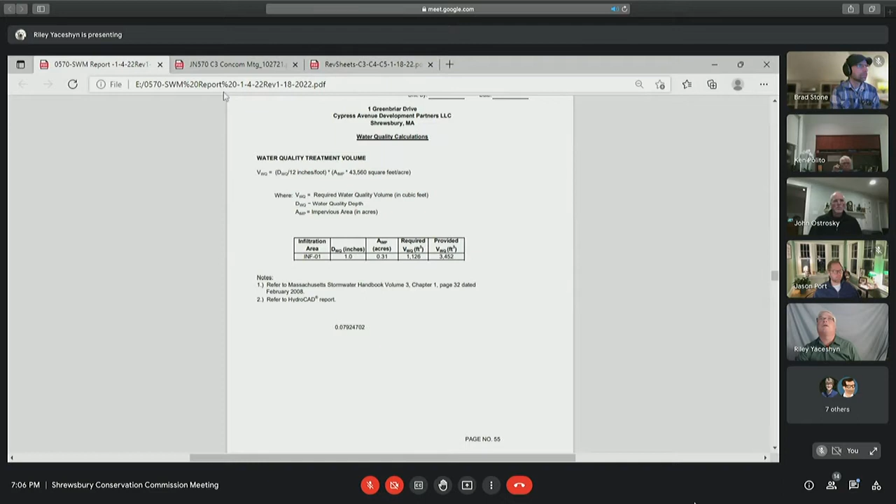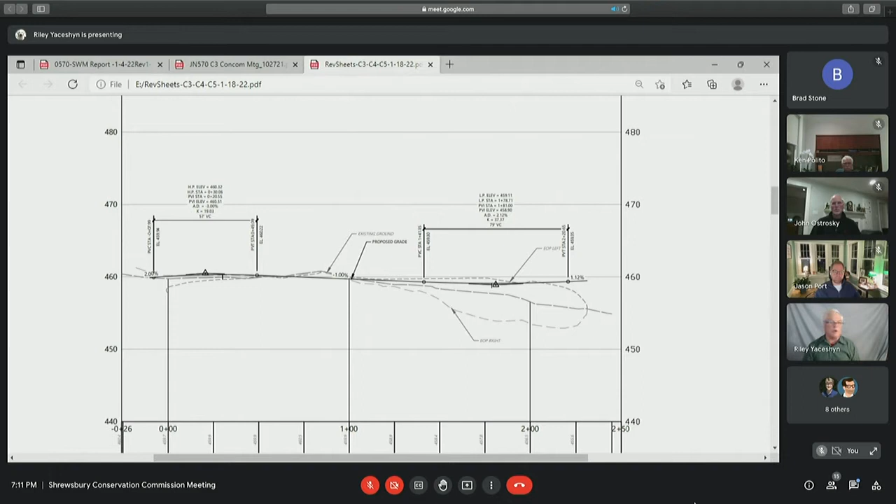Next page down, the profile of the road. Can you guys see that all right? The profile of the road is pretty flat coming in off the road. There'll be a little rise, a 2% rise coming in, and then it'll fall off on the curve to the end, with the low point being the middle of the cul-de-sac.

The plan is to put some trees and shrubbery around the outside edges of the cul-de-sac, as well as the vegetative mat, to help screen the area in the future.

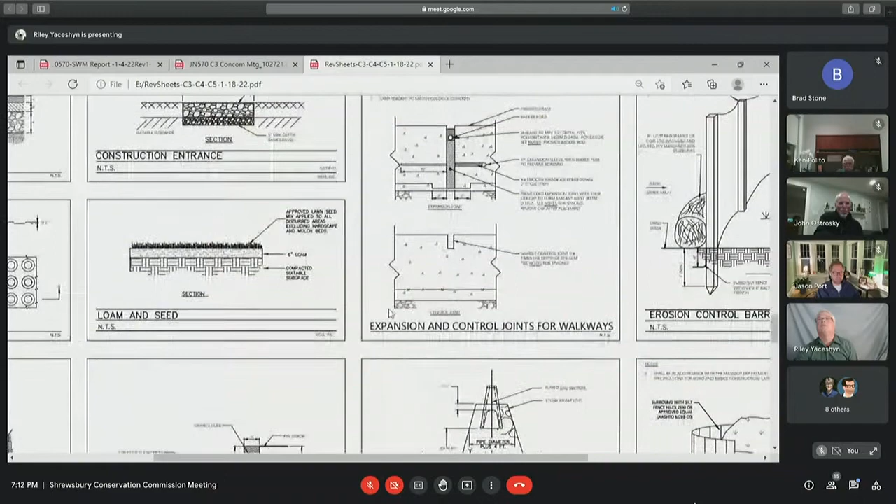And there we go. And what will the rain garden look like? Let's just show you on the outside.

You've got a 48-foot diameter inside curb area. On the outside is a 100-foot diameter roadway. It'll come to the middle with a 3-foot and 2-foot grass and stone filter strip that'll help with the runoff and infiltration.

Followed with a permeable soil rain garden area, and below that, you have crushed stone for infiltration. We've also met the recent testing for the observed groundwater and seasonal high, which were separated by a couple of feet, meeting your regulations.

I also have Greg Scotchie online. If you want to pull him in, he'll talk to you about the stormwater.

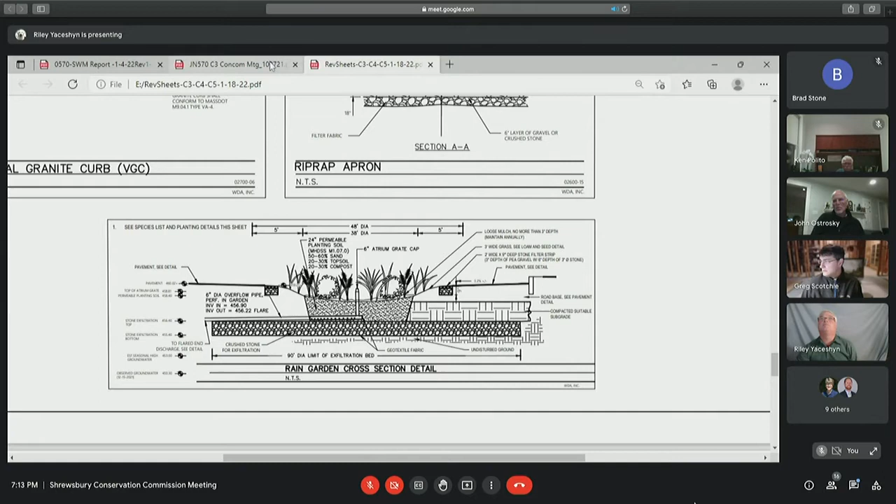Okay Barry, I'll just let you continue being the presenter. If you could go back to sheet 3 and kind of zoom out so we can see the cul-de-sac. The existing conditions, the lot as it sits right now, is a wooded lot, and we are proposing to put in the pavement and sidewalks.

That is our major change in terms of going from a pervious area to adding impervious hardscape.

We were able to change our design based upon the field data obtained with the test pits. We were able to fine-tune the design a bit with that information and bring down the earlier proposed pond, which Barry mentioned—he says it's a large pond, but really in terms of area it took up space, though it was relatively a shallow pond, so in terms of volume, not great in volume.

So that volume we were able to tuck underneath the cul-de-sac space and provide the required recharge that our impervious areas cause.

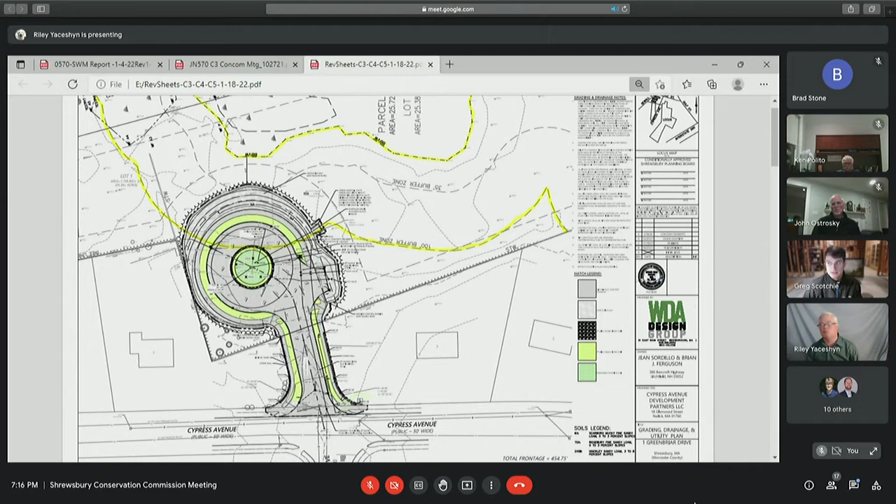I think that we sheet flow—Barry showed the centerline profile sheet. Flow generally falls from a high point near Cypress Avenue there at the beginning, starting at station.

Station 0. So the stationing starts at 0 at the right-of-way, and about 30 feet into the site we hit a high point. At that high point, which pretty much follows the existing condition, flow goes back to Cypress. We were able to not increase any flow or volume back into the right-of-way by setting our high point where it's located.

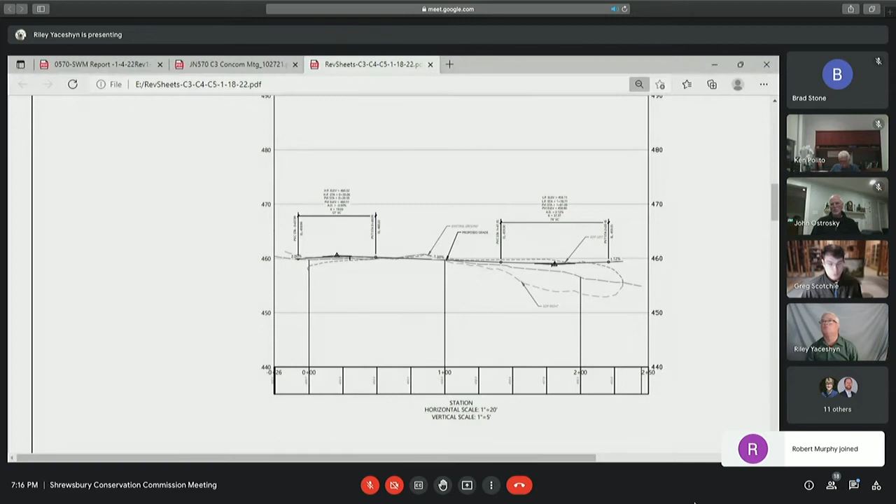Beyond the high point, everything flows back towards the cul-de-sac at about 1%. We have normal crown on the road, pushing everything to the gutter. And then when we get to the cul-de-sac area, channel flow from the gutters heads into the filter strip, the 2-foot stone filter strip, which also has 3 feet of grass behind it to slow that water down, spread it out, and have it be a controlled entry into the soil area.

I think that kind of covers stormwater. If you guys have any specific questions, I can try to provide more detail if and when necessary.

Okay, you guys are ready for questions now then? Sure. All right, Martha. Good evening. Thank you for your presentation.

I'm still trying to visualize this, and just so you know, I'm probably the resident expert on rain gardens on the commission. So what you're proposing is a rain garden that will capture all of the sheet flow from the road? Correct. And all be channeled into this central area in the middle of that cul-de-sac. That's correct. That's the intent.

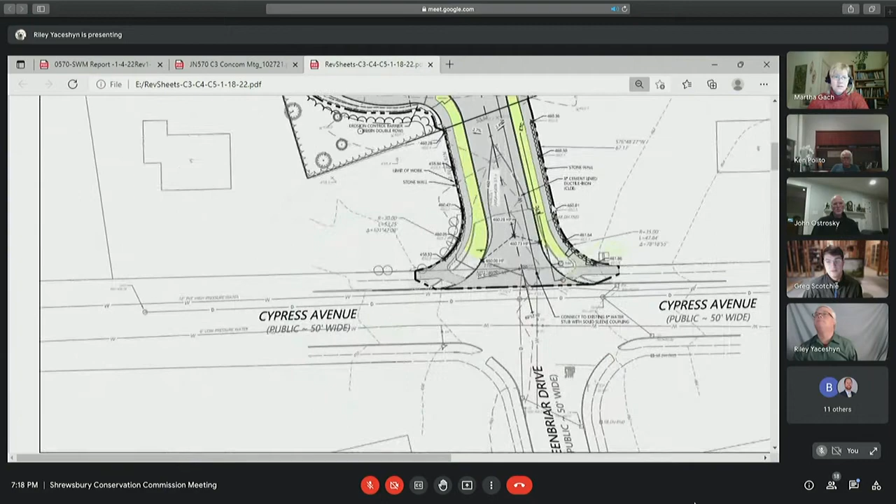Okay. Can you talk a little bit about the connections between the road and the rain garden itself? Sure. Barry, could you go back to the detail? I think that probably illustrates that best. Kind of zoom in there closely. So preceding the rain garden, right at the edge of the pavement there in the center, there'll be a 2-foot wide strip of stone, think of it like a trench.

We specified that 2-foot ring to be 9 inches deep with a certain size stone, and then at the top layer of that would be like a pea gravel type situation. So water will hit that and go down into the trench, slow down a bit. And then once it gets to the inner ring of that 2-foot stone trench, it hits a 3-foot grass strip as it comes down into the rain garden.

Does that help? Okay. And so everything from the outer, so you have the cul-de-sac, and on the outside of that there's a curb and gutter section, which goes up to the grass strip and then sidewalk. All of that drains down towards the center of the cul-de-sac. So think of it as everything's going to be pitched down into that center circle, it's almost kind of like a bowl shape. If you can think of that, not exaggerated, but more of a saucer, and it goes down to the center of the cul-de-sac.

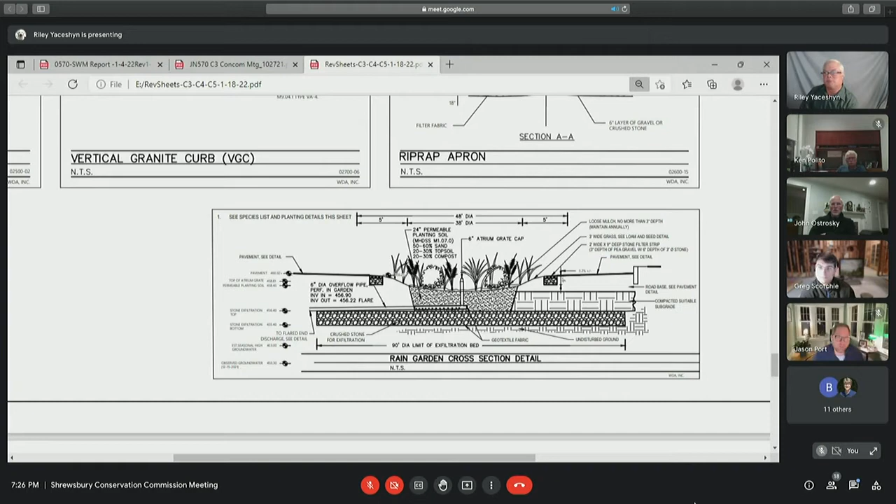Barry, you want to show them on the plan where that is? Up in here on the top corner, it comes out the middle on a drain line to a flared end on this little slope, riprap area, and then out into the natural grass and undergrowth.

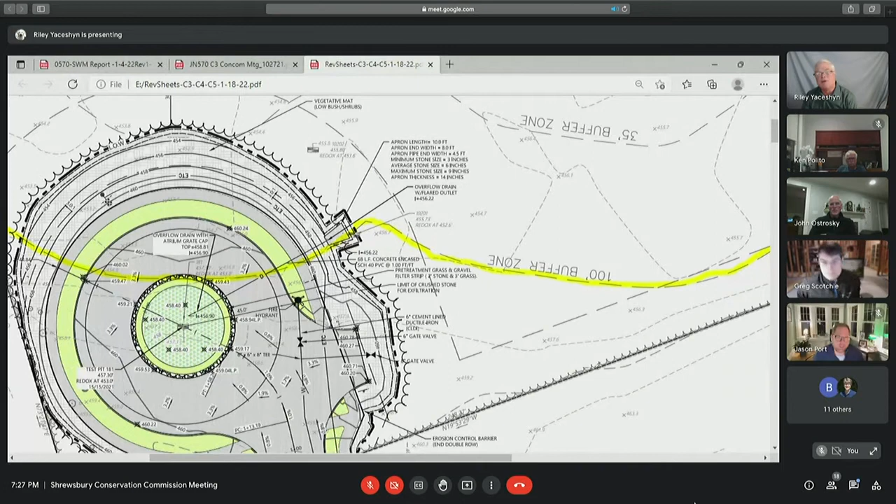So that should mitigate any flooding if it's not infiltrating into the ground. Correct. And you've got a considerable size of road there with infiltration stone under the pavement, so your depth of freezing underneath it - by the time anything freezes around the edges, it'll seep in. I'm not worried about the thing freezing and not taking the water down eventually. We've got enough storage and capacity on top of the rain garden to take it before it even enters the road.

What's the plan for the build out on the rest of this project? Schedule-wise, what are you looking at? We've got to apply for the permit, so I'm probably talking a year away.

That's before you could break ground, is that what you're saying? A year before you could break ground, or a year before? Depending on when we get our permit, a little less than that. We've got easily about 4 or 5 months of permitting to still continue. We need this to go first, and we've got planning to go, so we'd really appreciate it if we could get this segment of it approved.

And what was the reason for moving away from the detention pond again? What was the initial proposal? By the time - because of the existing grades - you put a drainage system in and get the flow enough by gravity, the pipe was discharging relatively close to the seasonal high groundwater, and we couldn't get enough storage over there for that.

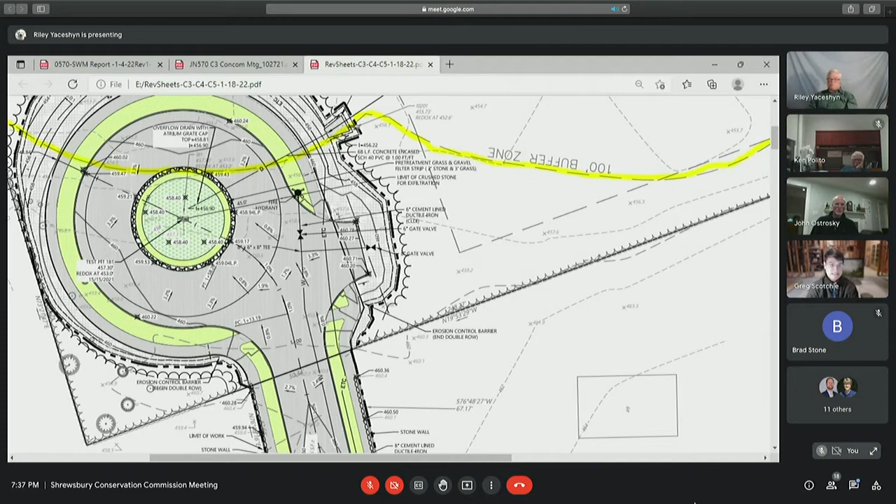So I think, as respectfully as I can, I see this from a different vantage point. Yes, there's maintenance, and I agree that in order for the rain garden to work, dead limbs need to be removed, plants that aren't successful need to be replaced, and leaf blowers or rakes need to be used to clear out anything that would cause clogging or sedimentation. So there is some active work that needs to happen, more than just annually — it's a seasonal activity. Visual inspections probably twice a month during key periods of the year. So there's definitely maintenance activity that would need to happen ongoing.

If I can also make sure everybody's aware that while it's a public entrance where Greenbrier is, the rest of the cul-de-sac and any kind of building out will be private and maintained by the development itself.

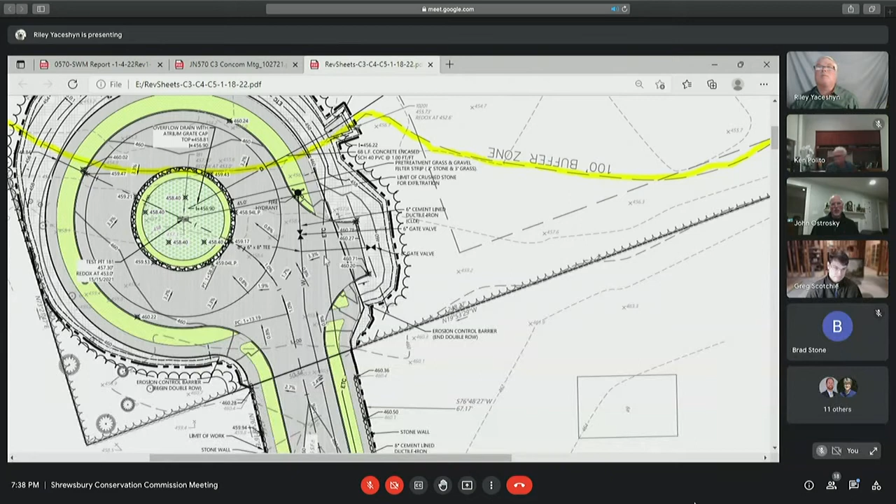Can you blow out the map and show us that, Barry? Where the public and private sides lie? Here's the current dividing line of private and public. Where's that, Barry, I can't see. My arrow's not coming up. Yeah, I see it now. If you move it around a bit — okay, I see it there. Yeah, that's the dividing line of the current property.

So anything below that is public, you're saying? That's correct. And anything above that line is private? Correct. And does that correspond roughly with the high point that Greg was talking about in the road? High point is just below that by about 20 feet.

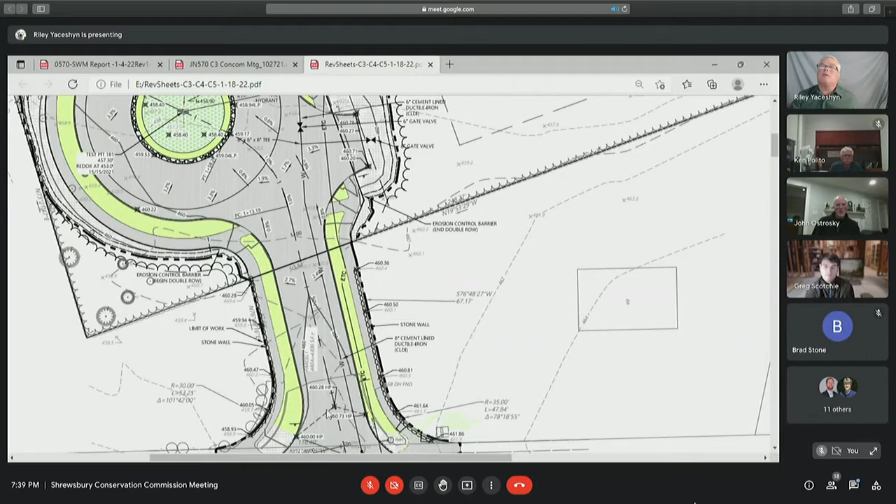Go ahead, John. Oh, Barry, I have the high point shown, you can kind of see the spot elevation there. These things are all further down, Barry. Oh yeah, sorry, down here, high point — where's that? Can you move the cursor a bit so we can see? I see it, it's way down. It's pretty close, down there, yeah, way down there. So everything else would be going toward the top of the page, that way. Yep, and toward the private side. Correct.

So if there is a problem here in the future and it does freeze and you have a total frozen lake up there, that really is going to fall onto whoever owns this property in the future. Correct.

All right, let me go back to the commission. I know a few members didn't have questions. Jason, did you have anything more to add? No, I mean, I think I would echo Brad's comments. Okay, and of some concern here, if there's an event like there was yesterday, what's to say the rain garden's going to capture this runoff?

And Ken, more? Yeah, so just so I'm clear, the cul-de-sac, the rain garden as proposed is going to be owned and maintained by a private entity. Correct. It will not be — the town will have no responsibility in the future either. In other words, when the project is built out, this will stay with the project. Correct.

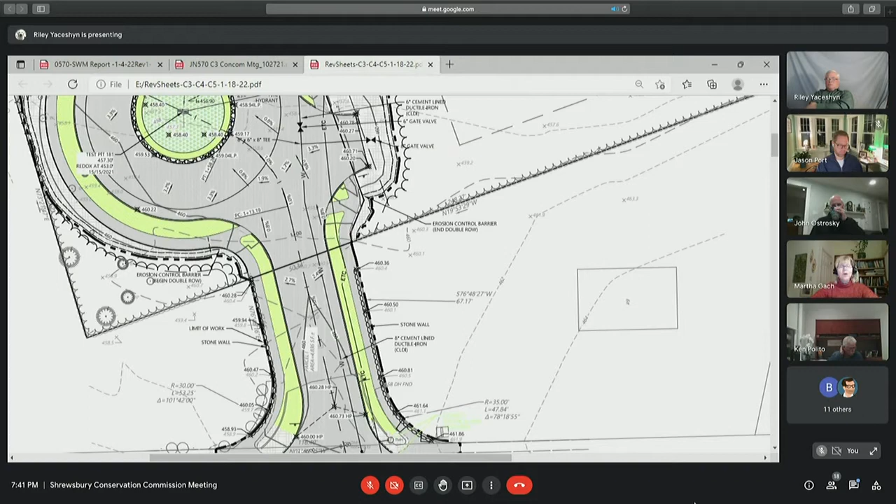I'm good, okay Ken. Martha, do you have any? I have one minor question, which is what will the relative depth of the rain garden plantings be? In other words, how far below the surface of the road will the soil be? I believe it's 6 inches. Did I miss it?

458.4 down to the top of the... let's see, 459.2 to 458.4. Okay, so that's about 6 to 8 inches.

Yep, okay. Many of the rain gardens that I've seen are lower. I don't know if that's a way to address some of the commission's concerns about the amount of water that could be intercepted when everything freezes. As a member, I would be fine with that. I don't think it's going to be so low that the plants aren't going to be able to grow because they're not receiving any sunlight, for example.

Okay, you all set, Martha? Yeah, Barry, on your overflow from the emergency overflow in the middle of the rain garden, that elevation is below the lowest point of the paved roadway, I take it? Yes. And how big is that pipe? The overflow pipe? I believe it has a 6-inch pipe. Okay, we could go larger. All right.

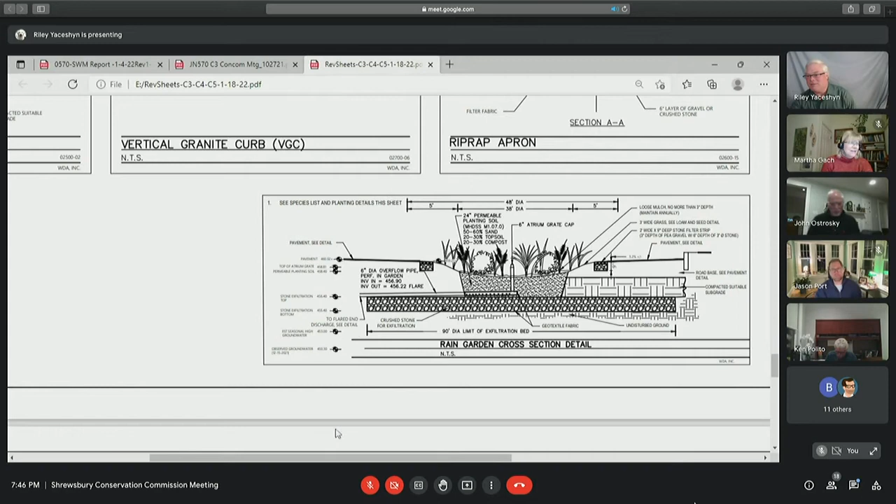Okay, we have another continued public hearing. It's regarding the notice of intent filed by 7 Cheryl Realty Trust for the construction of a wetland replication area at 581 to 587 South Street. Scott? Good evening, Mr. Chairman, Scott Goddard, representing the applicant in this case. I think there are still 2 related hearings on this topic. The purpose of tonight's meeting, and I'll keep it brief, is more of an administrative and procedural discussion.

I wanted to update you as to where we stood after the last discussion, the discussions I've had with the applicant and the engineer, as well as some follow-up discussion with Brad. So I don't think there's a need for me to bring up the site plans tonight. If you remember, initially there was a notice of intent submitted for a new subdivision that was a replacement of an old project from years back. And we found some discrepancies in the crossing design, not the design so much as the installation of the crossing from the prior owner.

New owner is trying to rectify that. We proposed a new notice of intent that involved basically exclusively after-the-fact wetland mitigation in the form of replication. So that's where we stood. I was sent back at the last meeting to go discuss with the applicant some options that came up at the meeting, most notably the inability of the existing culvert to meet stream crossing standards.

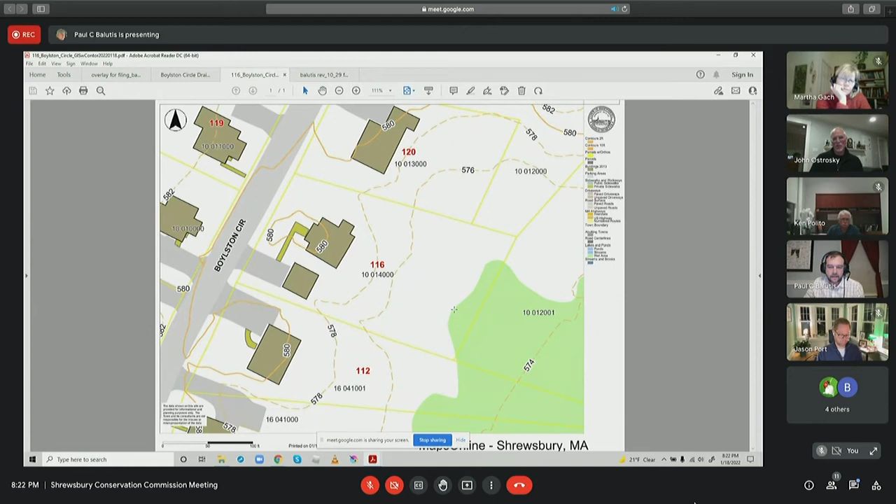What's the distance, Paul, from that green area—is that the edge of the wetland, the delineation of the wetland? I believe so. I just want to go back—this is a town plot plan from 2018 where the wetland buffer is established here. That's at least probably 80 feet from my house. And you can see the 100-foot buffer cutting right through there.

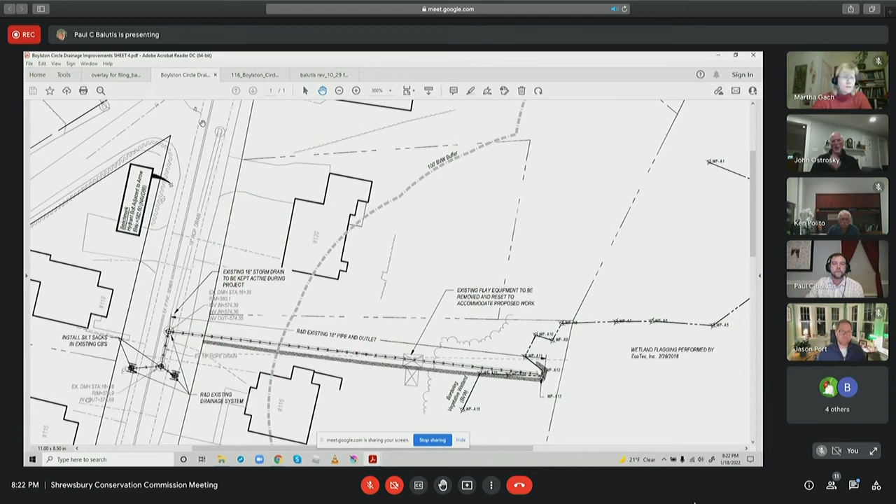Can you describe a little bit about what this construction is going to entail, Paul, in terms of foundation work—is it a slab on grade? Yep, we're envisioning a slab on grade. It's going to be a 2-story, essentially a garage with a room on top of the garage that connects to our existing home.

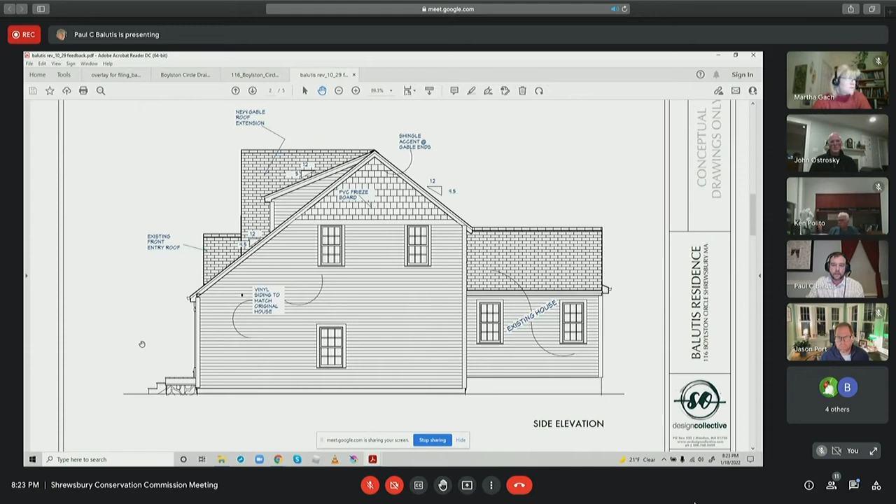All right, let's go to questions. Martha? I don't have any questions at this point. Thank you. Jason? I'm all set. Ken? No, I think that the new addition and garage isn't any closer to the wetlands than what was there, so I'm actually good with it.

Okay, Brad? Thank you. So I have a couple of things. One is a question for Mr. Balutis—now, you sent me the assessor list, thank you for that. Did you happen to notice if any of the property owners changed from that list versus the ones that you notified?

Yes, I did, Mr. Stone, if I can address you directly through the chair. When I notified the abutters about a week ago, I checked the Worcester Registry of Deeds showing that one of the abutters had actually changed hands, but the Shrewsbury official list of abutters still showed my old neighbor's name. So I addressed the abutters letter to my new neighbor based on the Worcester Registry of Deeds.

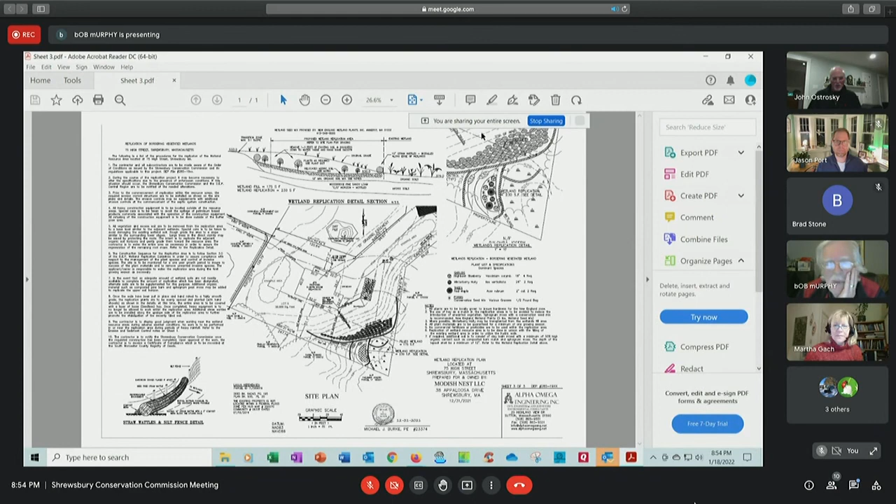Well, thank you very much for your help. All I see right now is a picture, but I assume you could see each other. Bob, do you know how to stop sharing? Well, there's a button here that says stop sharing, if I hit that. Yeah, okay, I see, you're back again. Now while I was sharing the screen, could you see me, or was I behind? Yes, oh you could see it. I hope I didn't make any funny faces. All I could see was the picture. Okay, well this has been a learning experience for me. Yeah, very good. Okay, well thank you all for your help. All right, good night, Bob. Okay, take care.

All right, that takes care of our hearings. Let's go on to our new and old business. And the first order is going to be orders of conditions.

And I think we closed 2 tonight, with the Greenbrier Drive one and the 116 Boylston Circle. There's one thing I noticed though, Brad, on 116 Boylston Circle, did they come through with a DEP file number? It doesn't look it.

Let me check really quick on that. Okay, I know they didn't have one at the last meeting. It was in my comments to the applicant in an email, I think, last week. Yeah, but you're right, that's a good point, so we probably can't issue one yet. But I'm going to go to the state's database right now and see if it's there.